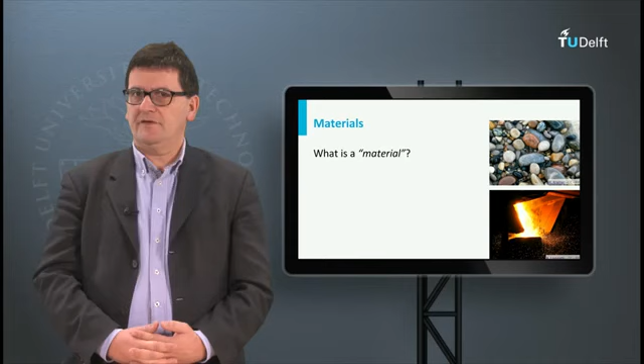To start with, what is a material? Although everybody understands what is meant with the material, it is very hard to give a nice and clear definition. Words like matter or substance pop up, although these words are not 100% spot on. So often we need to describe the word material.

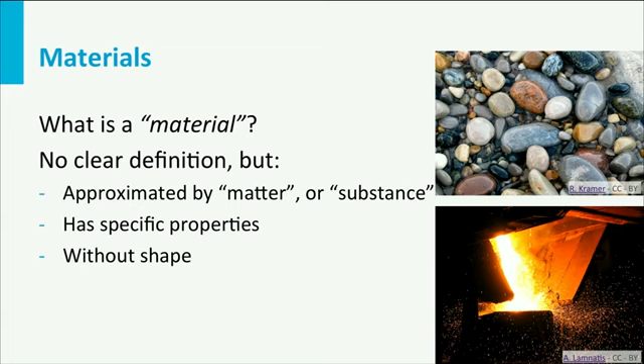A material has properties, and these properties are independent of its size and shape. So a material has many mechanical, physical and chemical properties. For example, a material has density, it has strength, it has electrical resistance. We can determine such properties by taking samples. But in the end, material properties are independent of the shape and size of the sample we analyze.

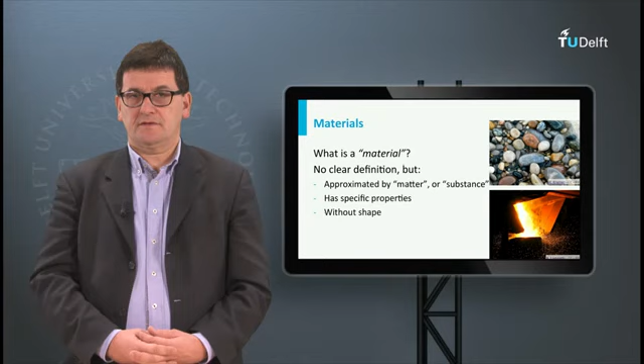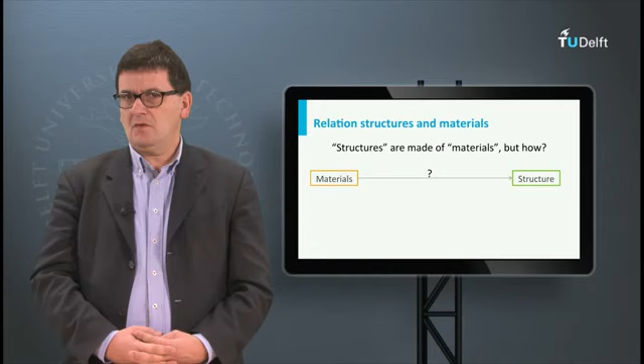Before, I have discussed the concept of structures. Think about the truss structures you have seen, the beam elements, and the stiffened shell structures. All these structures are made of materials, and some of the properties of these structures are directly or indirectly related to material properties. So we might ask, how are structures made of materials? I will use the following sequence.

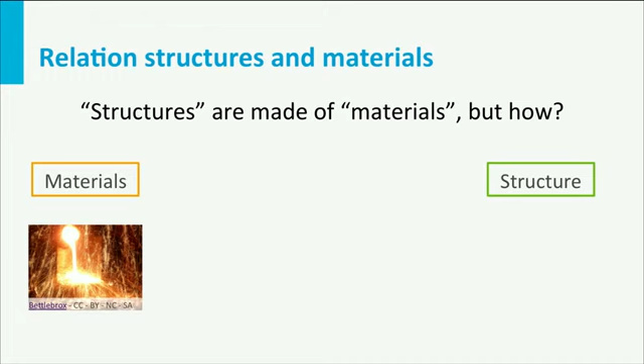First, materials are retrieved from ores, which are obtained from the crust of the earth by mining. Or materials are retrieved from, for example, oil by distillation and processing. Once the material is made, the materials will be shaped into semi-finished parts. Think, for example, about metal sheet, which is rolled to thickness on a mill.

These semi-finished products, or half fabricates, can be further processed into structural elements like beams. A metal sheet, for example, can be cut and formed into a C-frame. Once we have structural elements, joining these elements together gives us a structure.

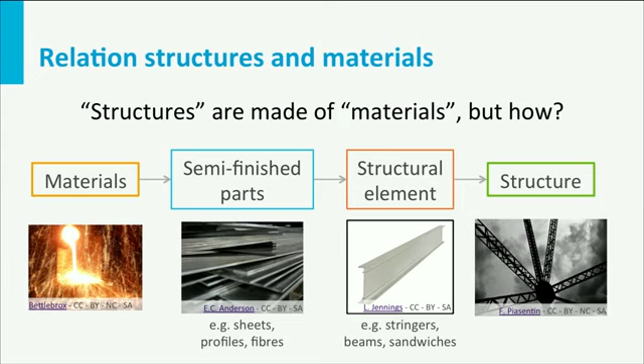Today there are many materials. Structural materials can be classified into 4 main groups: metals, polymers, ceramics and composites. Each of these categories have a huge diversity. Metals, for example, have many different groups like steel, copper alloys, etc. And each group has many different variants. There are thousands of different aluminium alloys and grades. Similar diversity is there for other materials, like the polymers or plastics, and the composites.

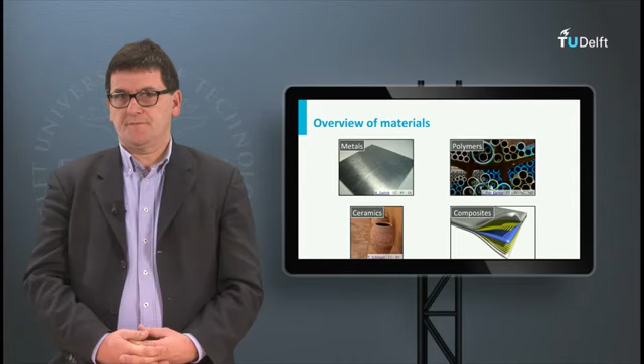If we look at the basic properties of these 4 main material categories, only metals and composites are used in aerospace applications. However, one ingredient in composites is a polymer. But as pure material, a polymer does not have sufficient mechanical properties to use it in high-performance structures.

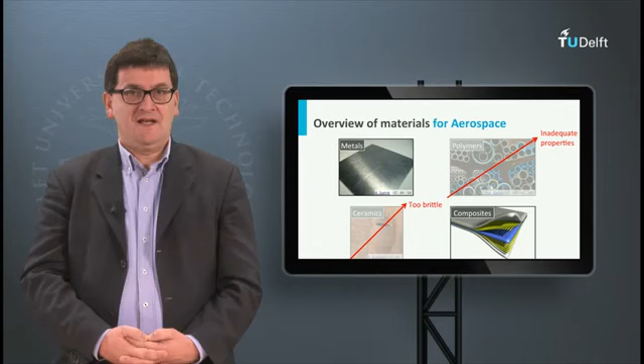Ceramics, on the other hand, are strong and stiff enough, but they don't have any flexibility and deformability. Think about pottery. If you drop a vase, the vase will break in many pieces without noticeable deformations. It is brittle. If a metal component is hit and fails, at least it will dent before it fails.

So metal alloys and composites are the main materials used in aeronautical applications. They are used because they have sufficient mechanical properties, high strength, high stiffness, and they are not brittle. In the next lecture, we will look at the material properties in more detail.